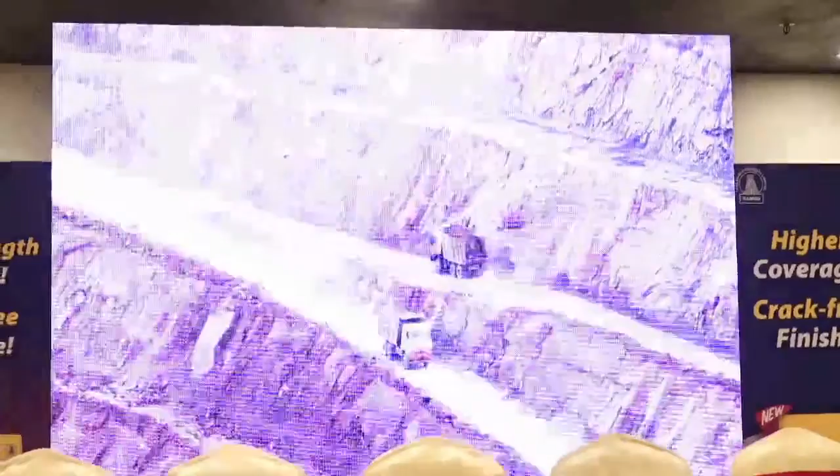In Pandalgudi, South India, at the limestone mines of Ramco Cements, we experience a commitment to change and a step taken towards restoring the environmental balance.

A phase-wise project that began in 2019 on 65 acres covered the next 150 acres in 2020. By 2023, we hope to cover over 800 acres of worked-out mines in the area.

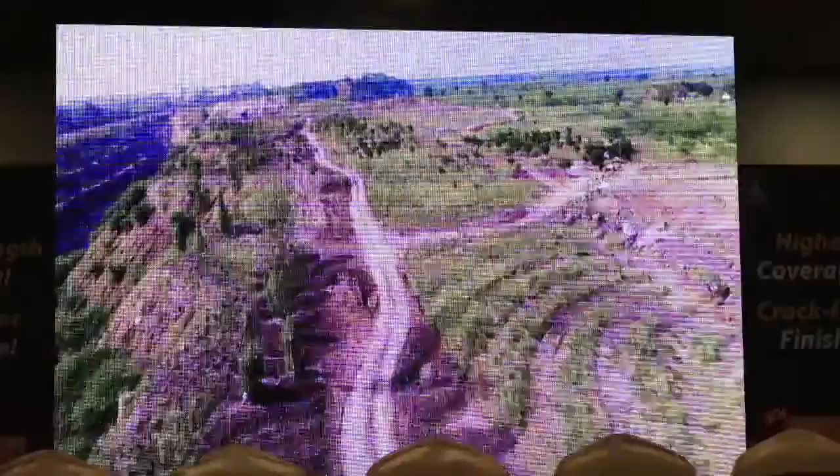So far, over 200,000 trees and shrubs have been planted on the land. This will rise to around 1 million once the project is completed.

And because biodiversity is the key for permanent change, over 80 species of native trees and shrubs have been used in the plantation.

Nature follows a process of succession, one life to the next. And now we know that a shift in our attitude towards the environment is essential if we wish to maintain a balanced habitat where we can continue to thrive as a species.

The process of change is constantly around us, whether we are aware of it or participate in it or not. The great realization comes when we see that our actions can influence the direction in which change will take us.

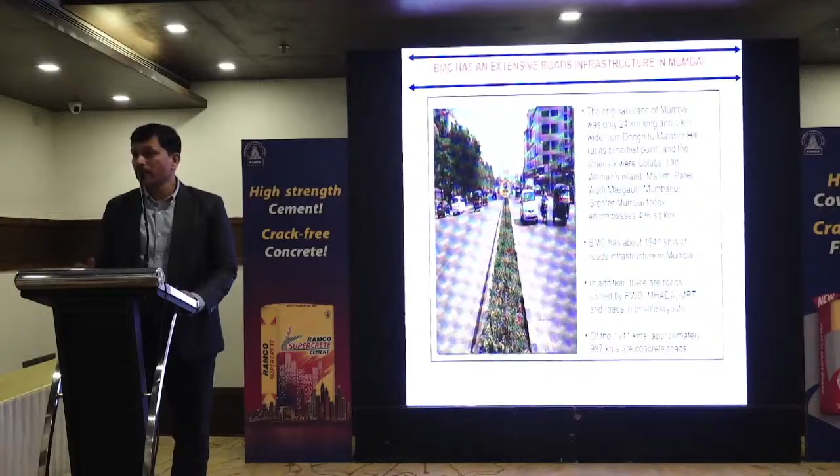I will not go into detail. As we all know, Mumbai is surrounded by the Arabian Sea, as Kerala is also surrounded by the Arabian Sea. So there are many factors similar to Mumbai. We have a rainfall of about 3,000 to 3,500 mm per year, while Kerala has about 2,700 mm per year.

Mumbai has a road network of approximately 2,000 kilometers of roads. Apart from these, some roads are owned by PWD, some by MHADA, some by MMRDA, MSRDC, and even private layouts. Till date, we have concretized up to 1,000 kilometers of concrete road in urban areas, which is the highest in our country if we are talking about city roads.

These are some of the activities normally carried out under the Chief Engineer of Roads and Traffic. Our Chief Engineer also looks after traffic departments, including maintenance, construction of development plan roads, maintenance of major roads and roads having bus routes, widening of existing roads, and various methodologies we use to improve roads such as asphaltification.

Then massification, interlocking, paver blocks, cement concrete, and finally thin and ultra-thin white topping. Apart from this, we have our own asphalt plant, ready mix and batch mix plant, where we produce our own bituminous concrete as well as cold mix for different emergency works. Another section is the traffic section, where we prescribe RLs and provide traffic amenities such as dividers, lane marking, traffic islands, and even pay and park.

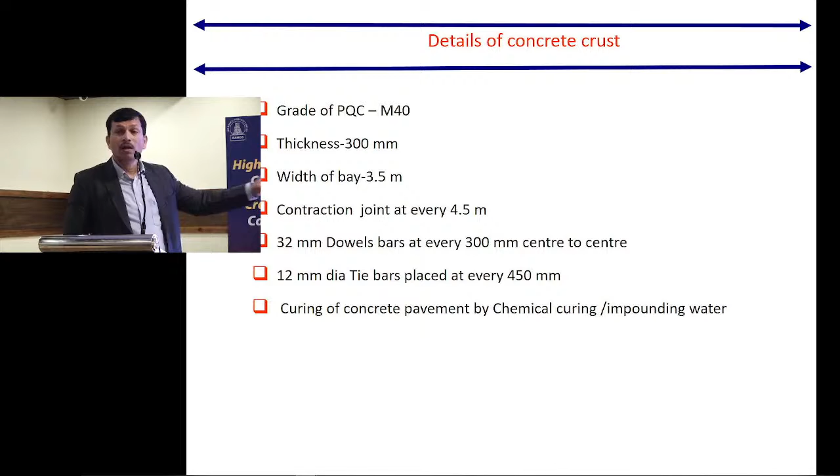Whatever these figures are, 32 mm or 12 mm, we actually design these. So after designing, these figures have come. Contraction joints, sometimes 3 meters, sometimes 3.5 meters - based on my experience, we arrived at these figures. But I repeat, we should design each and every road.

These are a few things we should keep in mind before, during, and after construction. Normally in Mumbai, we have a planning department - a team of engineers visits RMC plants. We have our own specifications, plus we approve RMC plants with RMC MA, so that whatever concrete comes on our site, the site engineer is assured it is from an approved batch mix plant, and we get good quality concrete.

Temperature plays a very important role in placing concrete. As per IRC, temperature should not exceed 30 degrees centigrade. If it exceeds, at your RMC plant you should use ice flakes so that your temperature reduces. As far as possible, concreting is done after 6 o'clock in the evening or early in the morning, so that we can maintain the laying temperature of concrete.

We strictly use RMC, so no site mixing is allowed. Then, covering the concrete surface with wet burlap immediately after finishing, and application of concrete curing compound. Curing plays a very important role in case of cement concrete pavement because the heat of hydration is tremendous in cement, and nowadays, whenever we use OPC, we get higher strength. So to maintain the moisture content in that concrete, we should immediately cure that concrete surface, either by chemical curing or pond curing.

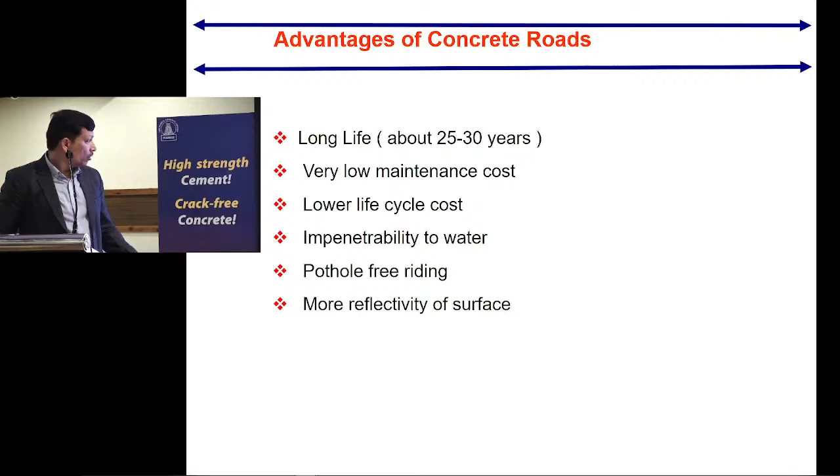Now I will go to the next topic, that is white topping. These are the practical problems which we normally come across with bitumen roads.

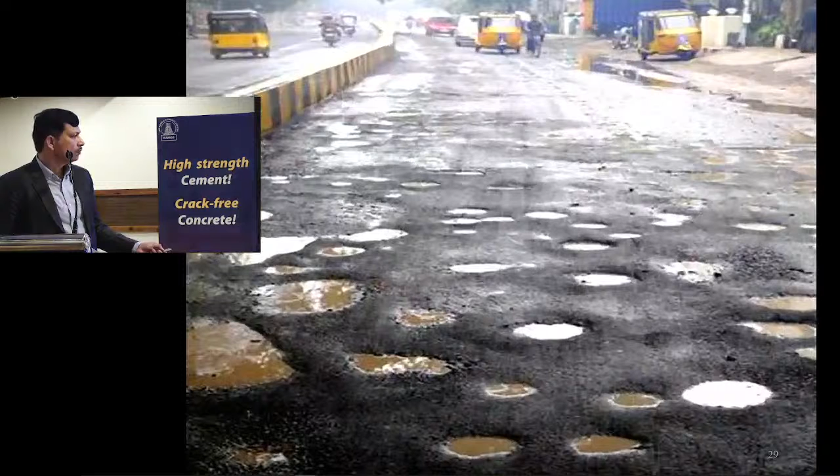These are the problems we normally come across - rutting, cracking, settlement and potholes. These are common problems seen all over India, which are expensive if the service life cost is considered.

Now, what are the reasons behind this distress? Why does this road get damaged? Improper subgrade - if your subgrade is not proper, water percolates and your consolidation is disturbed. Improper surface and subsurface drainage - this is a very important point, so surface drainage plays a very important role.

Whatever rainwater comes should move off the concrete or asphalt surface so that water is not stagnated on that particular pavement. Whenever water is stagnated on the pavement, and if rain is coming along with a high tide, your asphalt pavement gets deteriorated. The process is very slow, but it starts getting deteriorated. Leakage in underground water mains and wet utilities also contributes to this.

If you talk about Mumbai, some utilities were laid by Britishers, 150 years old, so they are getting damaged. Water comes out of these pipes and conduits, and there is a scouring action, so your pavement gets damaged. In most parts of our country, most of these utilities are below the ground, so we are not able to find out whether the joints are intact. After a few years, this problem arises - few years means 20, 25 years. So now there are instruments to find out the leakages of these wet utilities.

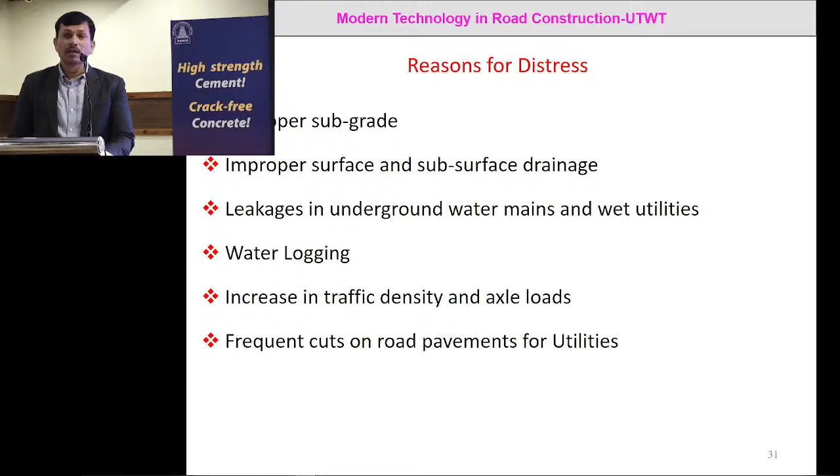So the STAC committee has also given guidelines on how to tackle this reinstatement of trenches, and we follow those STAC guidelines.

Current practice, whenever there is a pothole: we cut it into a geometric shape, clean the existing surface, put cold mix and roll it, and it's open for traffic. This is the normal procedure which we carry out.

But in Mumbai now we are addressing potholes with geopolymer concrete, with rapid hardening concrete, even with paver blocks, and even in some cases with M60 grade of concrete.

Now this is the current practice. Is there any alternative which will be durable, cost effective, and technically superior? We found it - it is nothing but white topping. White topping is a concrete overlay placed on an existing asphalt surface. By definition, it is a Portland cement concrete overlay constructed on top of an existing bituminous pavement.

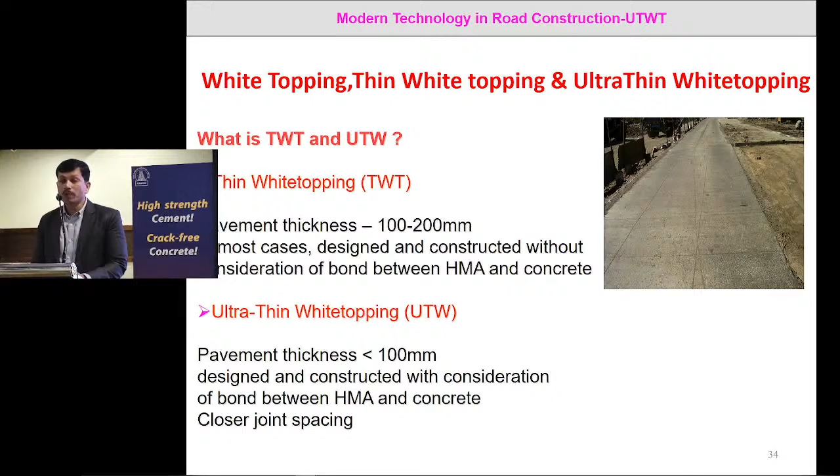There are three types of overlays: conventional overlay, thin white topping, and ultra thin white topping. This is differentiated as per their bonding and as per the thickness of pavement. Whenever the thickness is less than or equal to 100 mm (4 inches), we term it ultra thin white topping. Whenever the thickness is between 100 to 200 mm, we term it thin white topping, and the last one is conventional white topping. This is the typical cross section of thin or ultra thin white topping.

Normally, whenever we construct any pavement - whether asphalt, concrete, or interlocking paver block - we first excavate, then roll it, then put different layers: GSB layer, wet mix, DLC, and PQC, and it is allowed for curing.

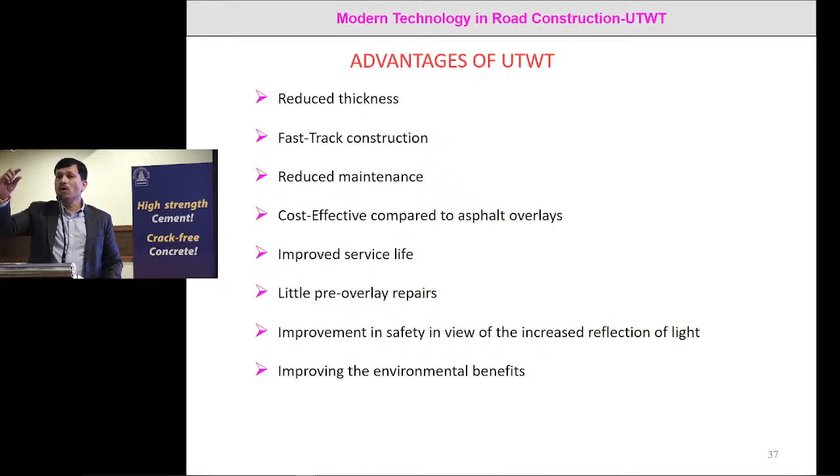Advantages: since we are not excavating anything, we only need a thickness of 100 mm, so we call it reduced thickness, fast track construction. We are not waiting for 3 to 4 months - within 7 days we are opening it for traffic. So we say it is a fast track construction technology.

It is cost effective as compared to asphalt, has improved service life, requires little pre-overlay, and improves environmental benefits. We are using mineral admixtures and chemical admixtures. In mineral admixtures, we are using byproducts - microsilica, fly ash, metakaolin, Alccofine. These are all byproducts we use in concrete without disturbing the quality of concrete.

As I said, we are milling the surface. Why are we milling the surface? To have good bonding between asphalt and concrete. Due to this bonding, it ensures a composite action between asphalt and concrete.

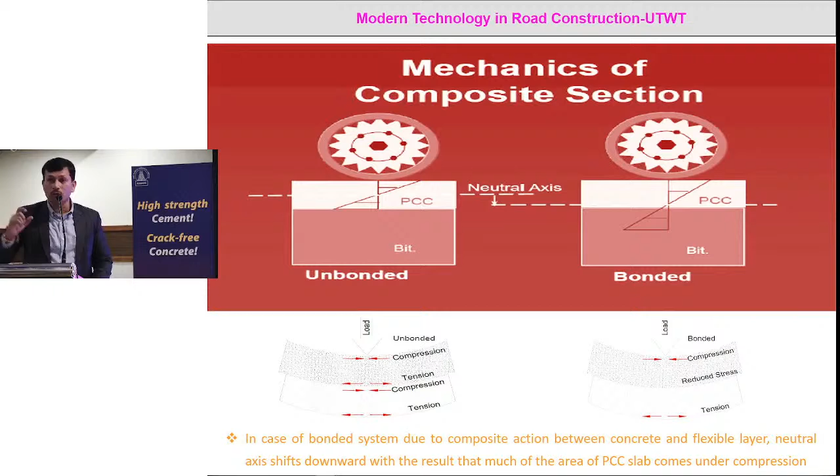If it is unbonded, then your neutral axis is in between. But if it is a bonded layer, your neutral axis comes down and we get more compression zone that we can use in white topping. Due to this, your stresses reduce.

For environmental benefits, we are replacing natural aggregates with waste tires. We have a number of waste tires which we normally dump to dumping grounds, and when we burn that waste tire, toxic gases come out, which are very dangerous to human health. So during my PhD, I had done this experiment.

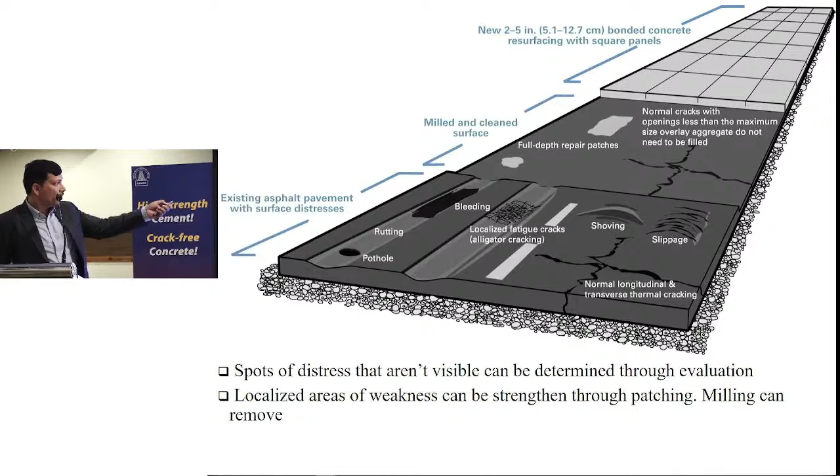Before construction, we have to just mill the surface, and on this milled surface, we have to put this white topping. This is the construction methodology.

Your temperature should be less than 30 degrees centigrade. RMC concrete should be strictly from an approved ready-mix concrete batch plant, and immediately your top surface should be covered with chemical curing.

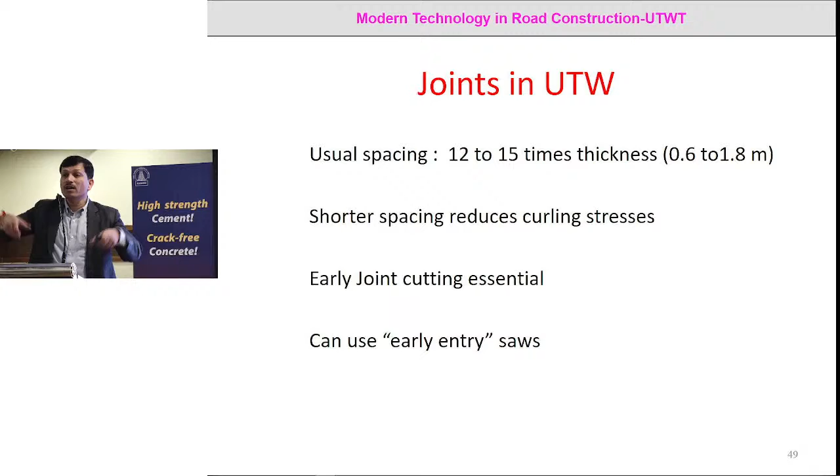Again, if you compare with concrete pavements, we are cutting at every 4.5 meters. But in this technology, we are cutting after every 1 meter. Due to this, whatever curling stresses are coming get reduced. So this is one of the advantages.

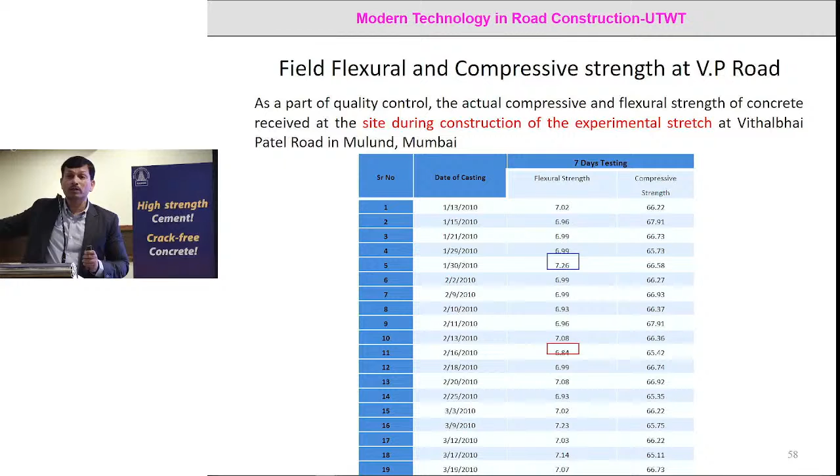IRC says that whenever we achieve 4.5 Newton per mm square flexural strength, we can open for traffic. Here we had achieved, after 7 days, 6.84 and 7.26. This means practically we can open for traffic after 72 hours. We don't have to wait 3 to 4 months. Even after 72 hours, we can open a new road for traffic.

But before that, we had done some instrumentation on Vithalbhai Patel Road, since this technology was new. As we all know, we assume something, do calculations, and if it is within permissible limits, we take that thickness. But we had proved practically what the figures should be while designing, meaning what the stresses and strengths would be coming on the concrete pavement.

So these are the strain gauges. We had thermocouples and strain gauges on the concrete. These are all practical photographs.

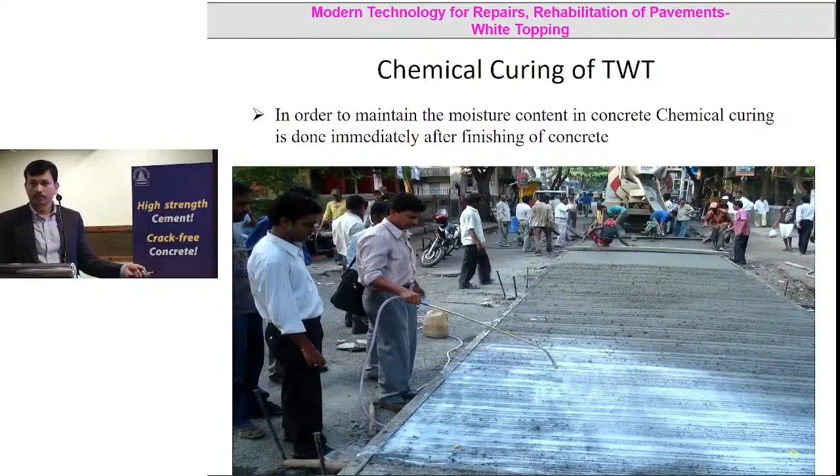Okay. I will finish these 2 slides, and then the coastal road after 10 minutes will take, with the permission of sir. So...

This road we had done within 3 days. Even after 14 years, there is not a single pothole on this pavement. We had done more than 100 roads in Mumbai. There is not a single pothole, not a single distress on this road by using this ultra thin white topping technology. We had started in 2006, and still these roads are there.

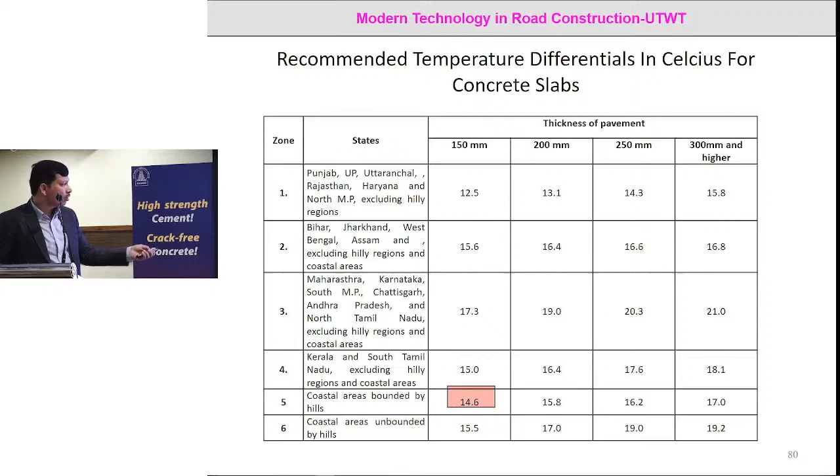All types of traffic are plying on this particular pavement. These are all the results. All types of tests have been carried out. Non-destructive testing has been carried out for durability. We are designing for sustainability.

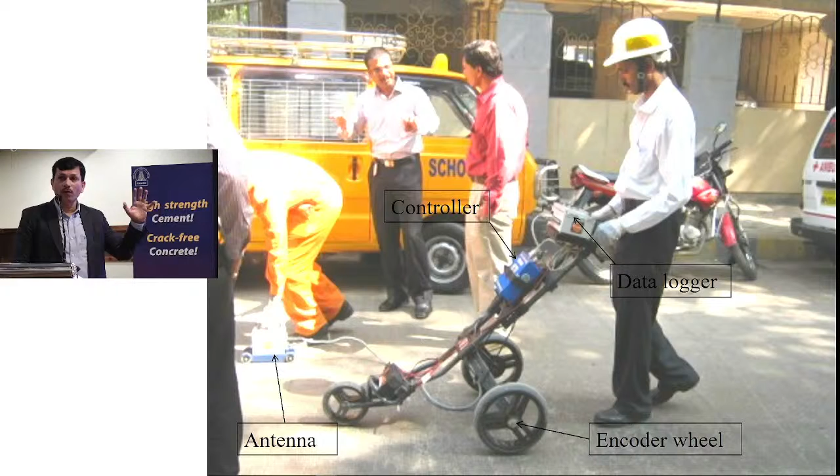Even we had done radar tests. In most cases, we don't know what utilities are underground. So this radar test was done because what we are doing is just milling the existing pavement and putting concrete pavement on top. We have to ensure a perfect bond between these two different materials. To ensure the perfect bond, we have done this radar test after every 2 years, and till date we have found that there is a perfect bond between concrete and asphalt. So these are the results.

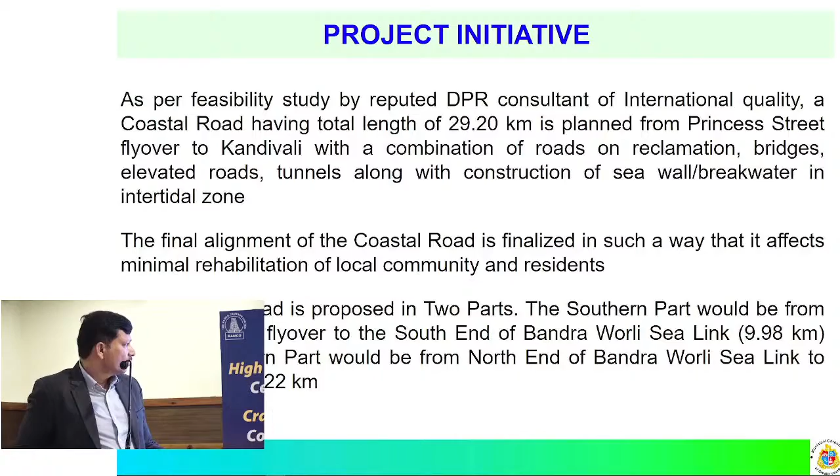So the alignment starts from Marine Drive, Nariman Point, and goes up to Kandivali. The total length of this project is 29 kilometers. This project is divided into two phases, phase 1 and phase 2.

Phase 1 starts from Marine Drive and joins the existing Bandra-Worli Sealink. Phase 2 starts from Bandra-Worli Sealink and goes up to Kandivali. So these are the two phases where the detailed project report was prepared.

We had invited tenders for phase 1. Currently, whatever the Mumbai Municipal Corporation is working on, we are working on phase 1, which is from Marine Drive to Bandra-Worli Sealink.

So we are calling it the south part and the north part. Now we are addressing the south part, which is the alignment starting from Marine Drive and joining the existing Bandra-Worli Sealink.

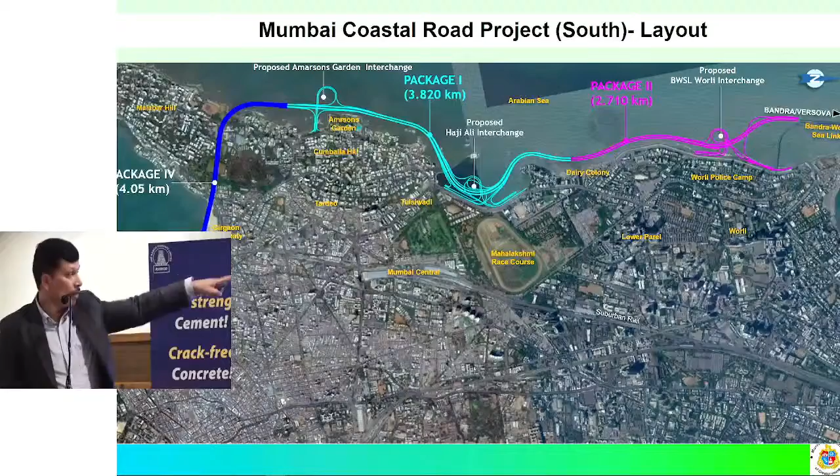This is the 3D view of that particular alignment. In between we are having interchanges at different locations, meaning from the coastal road if you want to come to the regular road, or from the regular road if you want to go to the coastal road, these interchanges allow you to reach your destination.

Now these are the different studies carried out during the planning stage. First, analysis of alternative alignment. We had studied about 8 different alignments in detail, and out of these 8, one alignment was selected.

Impact on roadside trees, because environmentally we should not harm trees since they provide oxygen and various other advantages. Impact on religious and heritage structures was also studied, since Mumbai has various heritage structures and religious structures in and around it, so a detailed study was done.

Sea level rise and natural drainage pattern was an engineering study for which we appointed National Institute of Oceanography located in Goa. Their scientists studied the last 100 years to find the maximum sea level during that period, and accordingly guided us in preparing our RFP, request for proposal.

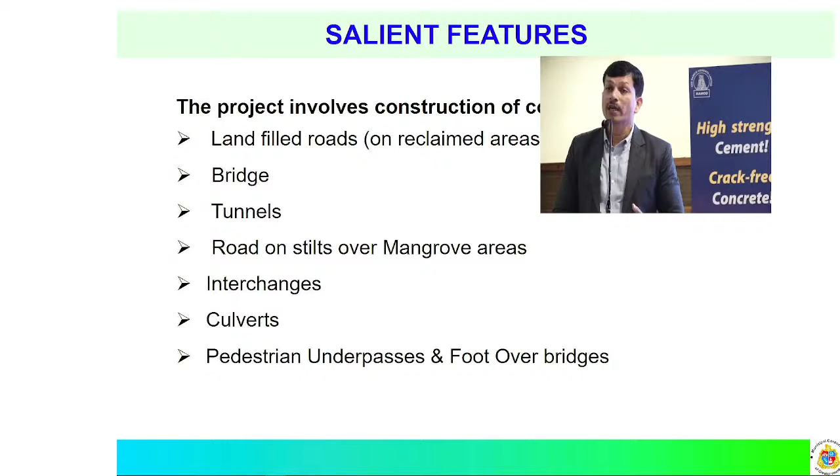Now the salient feature of this project is that it consists of everything: bridges, roads, tunnels, reclamation, gardens. So it's a dream project basically for any civil engineer. If he is working on this project, he will get all this experience under one roof. There are landfill roads, bridges, tunnels, road on stilts over mangrove areas, interchanges, culverts, pedestrian underpasses and foot-over bridges. So all parts are covered under one project.

That was for the entire project of 29.2 kilometers. Now we'll concentrate on the south portion, for which we had already invited tender and work is in progress. We are having a total length of 9.98 kilometers, now increased to 10.58 kilometers linear length. If we consider all interchanges, then it is more than 20, exactly 25.9 kilometers. We are having twin tunnels.

The tunnel starts from Marine Drive and comes near Nepean Sea Road, near Priyadarshini Park. The diameter of these two tunnels is 12.19 meters, which is the highest diameter in India as far as road tunnels are considered. The length of the tunnel is 3.45 kilometers each.

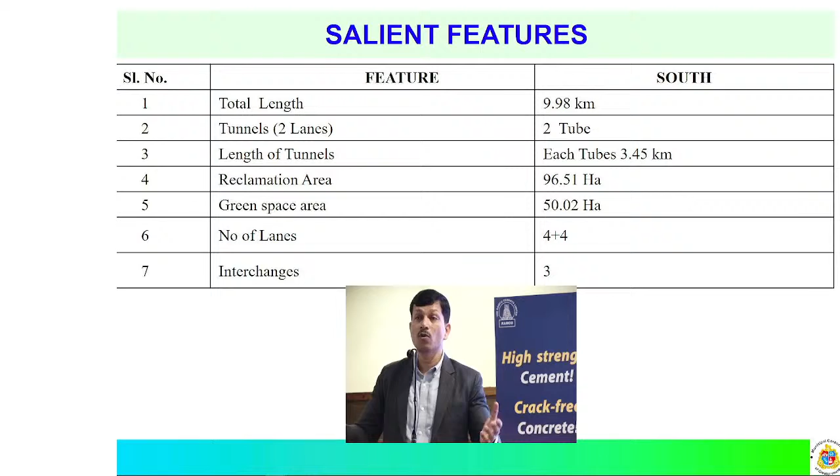Green space was originally 50.02 hectares, now increased to 70 hectares. Mumbai does not have open space for Mumbaikars to go and spend their time and relax. So we are creating open space for the citizens of Mumbai, about 70 hectares, such a huge open space. It will be totally green, with no commercial activity, no shops, no eatable items, only facilities for citizens, where they can sit, walk, jog, use a cycle track, and enjoy sitting there.

Number of lanes is 4 plus 4, and there are 3 interchanges. So these are the salient features of the Mumbai Coastal Road project, south portion.

Of course, traffic density plays a very important role, whether it is a road project or a coastal road project. So traffic study was done at every junction, and traffic was calculated for what would be the expected traffic in the year 2034. We studied traffic for a number of years, and accordingly the road and the project have been designed.

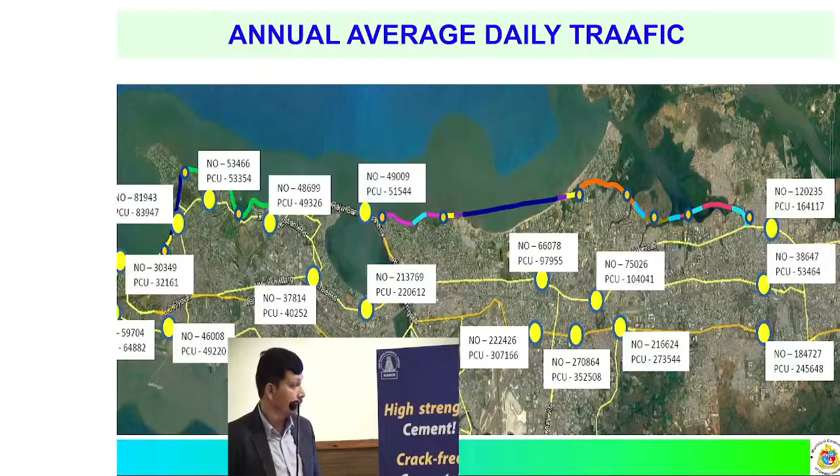Since it is into the sea, to protect the sea from waves, we are constructing a seawall. The length of the seawall is 7.47 kilometers with an average height of 8 meters. Such a huge seawall we are constructing on this particular project, along with massive reclamation up to 111 hectares into the sea.

On the sea side, we are putting armor rocks. Previously there were tetrapods made of concrete, but now we are using natural stones as armor rock. The weight of each stone varies from 1 ton to 5 tons. Such heavy rocks are placed so that the energy of sea waves is dissipated into these rocks.

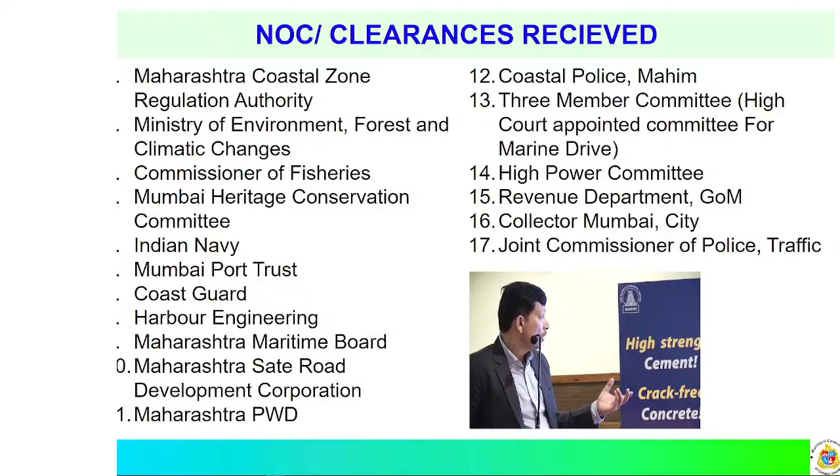So before inviting the tender, we had taken all these NOCs from the Maharashtra Coastal Zone Regulation Authority, MCZMA, MOEF, then the Commissioner of Fishery since we are constructing into the sea, then the Mumbai Heritage Conservation Committee, since there are a number of heritage structures in and around Mumbai. Then the Indian Navy at Colaba, Mumbai Port Trust, Coast Guard, Harbour Engineering, and Maharashtra Maritime Board. In total we had taken 17 NOCs before inviting the tender.

We had divided the project into packages. Previously, before inviting tenders, there were 4 packages, but looking at the size of the packages, we clubbed one package into another. So now there are 3 packages, as the third package has been clubbed into package 4. So these Mumbai Coastal Road project packages are package 1, package 2, and package 4.

These are the various contractors which we had appointed for this project. For package 4 and package 1, we had appointed Larsen and Toubro (L&T), and for package 2 we had appointed Hindustan Construction Company (HCC) in joint venture with HDC, Hyundai Development Company.

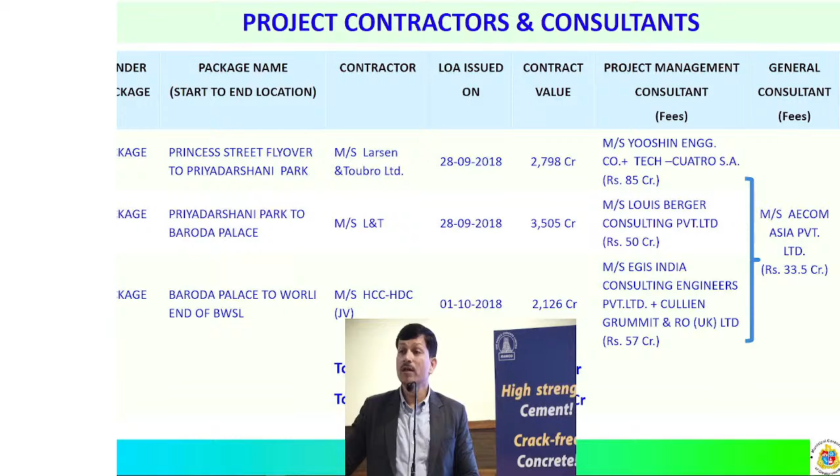Each package has one contractor, and for each package we have one project management consultant. For the 3 packages there are 3 project management consultants, and above these 3 project management consultants there is a general consultant. Above the general consultant we, the clients, are the Brihanmumbai Municipal Corporation. So this is the chain for this particular project.

The project management consultant is responsible for day-to-day quality control, quality assurance, and everything in day-to-day work. He has to look into it. If any specific sanction is to be taken, he has to go to the general consultant. The contractor goes to the PMC (project management consultant), the PMC goes to the general consultant, and then they submit the proposal to the client, BMC, for approval.

This is basically an EPC project. In this project, we had given only parameters; we have not mentioned any BOQ. This means the contractor is free to use any technology and any material, provided he does not diverge from the given parameters. So we had included some clauses.

If the contractor finishes the contract within the time limit or before it, he gets a bonus. If it exceeds the time limit, there is a penalty clause. So the contractor is free to bring any technology, which is then studied by the project management consultant, who submits reports to the GC, and finally it is approved by the client, BMC.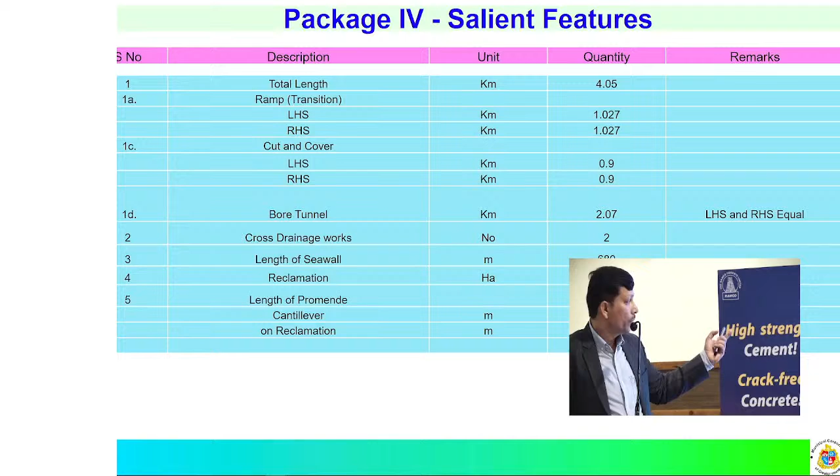Now package wise, we will just see. In package 4, the length of that particular package is 4.05 kilometers. It consists of cut and cover, it consists of bore tunnel, it consists of sea wall, it consists of reclamation, promenade, cantilever. So various points, various items are there, and you can see the quantity of each item in case of package 4.

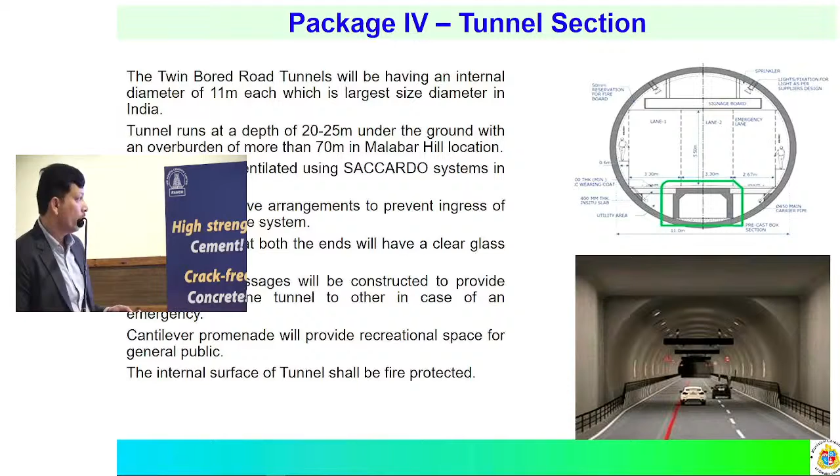Now, as I said, the diameter of tunnel is 12.19 meter. This is a twin road tunnel with internal diameter of 11 meters, external diameter 12.19 meters. For the first time in India, we are using Saccardo system of ventilation. Normally in tunnel there are ventilators at every equidistance, but in this we had provided Saccardo system. There will be one machine at one end, and from that end whole fresh air will be passed. So the number of fans will be reduced, and it is a proven technology outside the country, but in our country we are using it for the first time.

And there are two tunnels, and we had provided cross passages for connecting these two tunnels. If any accident occurs, then citizens can move from one tunnel to another tunnel immediately. In addition to that, we had provided SCADA system. We are going to provide cameras at equidistance. We'll be having one control room 24/7, so that if any unforeseen incident happens, immediately we can give help and we can evacuate the tunnel. So all precautions have been taken.

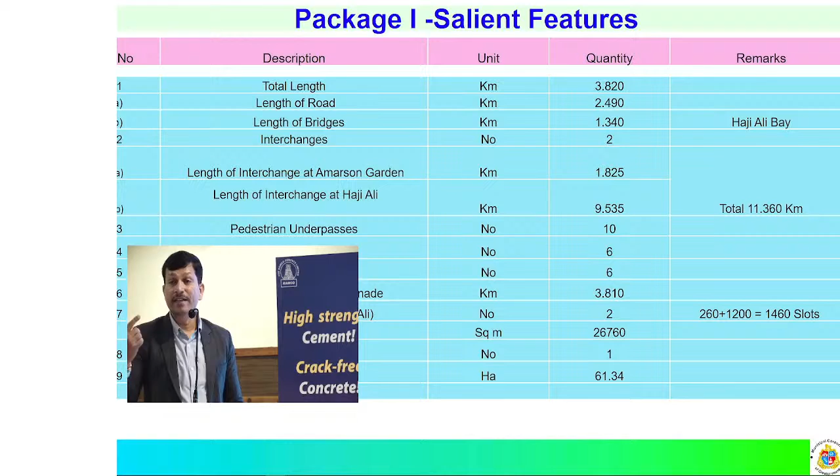This is package 1. The length of package 1 is 3.82 kilometers. This package starts when the tunnel ends. After that, there are reclamations. There are interchanges. This package consists of two interchanges, one at Amarson Garden and one at Haji Ali. Plus they are having two underground car parkings. Below there will be two levels of underground car parking. Above there will be a beautiful garden, and below that garden there will be two level car parking. So these are the details of package 1.

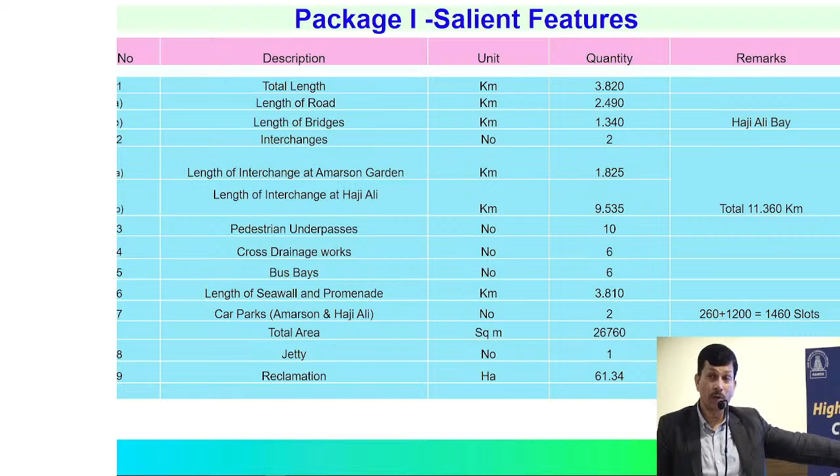They are having interchanges, then pedestrian underpass, cross drainage, bus bay. We are providing bus bay at equidistance. Whenever the bus comes, it will come inside and then go out. It will not block the existing pavement, existing carriageway. And these are the slots of car parking. In package 1, we are going to provide approximately 1460 slots.

Now I had just mentioned the span. What are the different spans for this project? Bridge spans in meters: 28 to 30, there are 7; 45 to 50, 50 to 55, 12, and 60 meter. At the request of fishermen for navigation of small boats which normally go for fishing, we had given a distance between 2 piers of 60 meters. Now, as per norms.

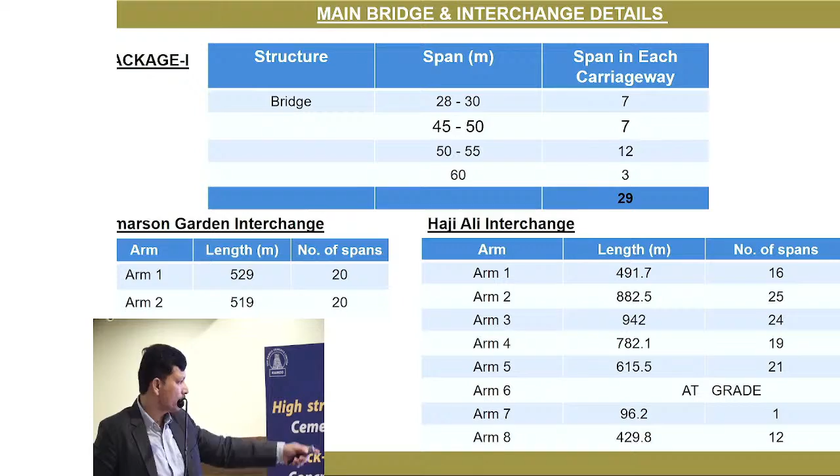Now this is the last package, package 2. The length of this package is 2.71 kilometers. This package is having one interchange, which is at Worli Sea Face. This package will be having a temporary jetty. These are the details of this particular package. It has bridges, outfall, connectors, pedestrian underpass, cross drain, bus bay, sea wall and promenade.

It is common for all car parking. Again, this package is having 2 car parks. The total car parks will be around 400. Again, it will be below the garden, 2 levels.

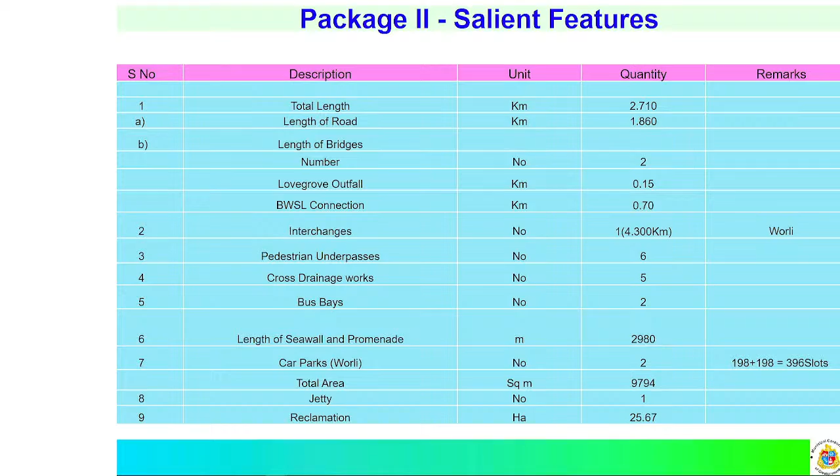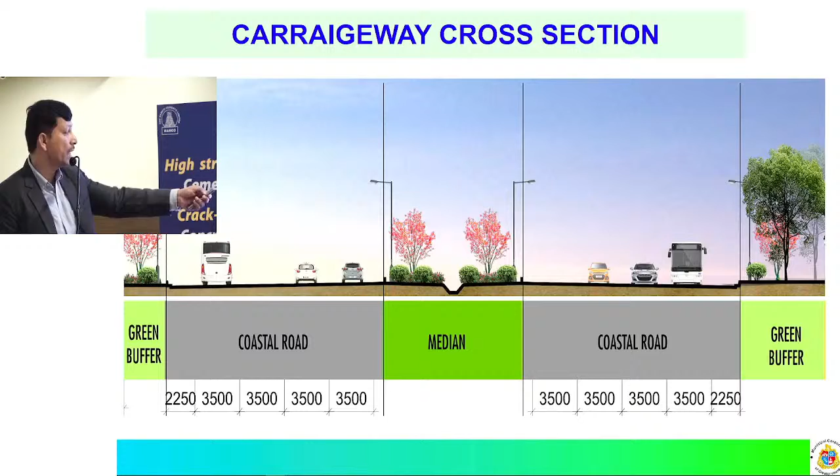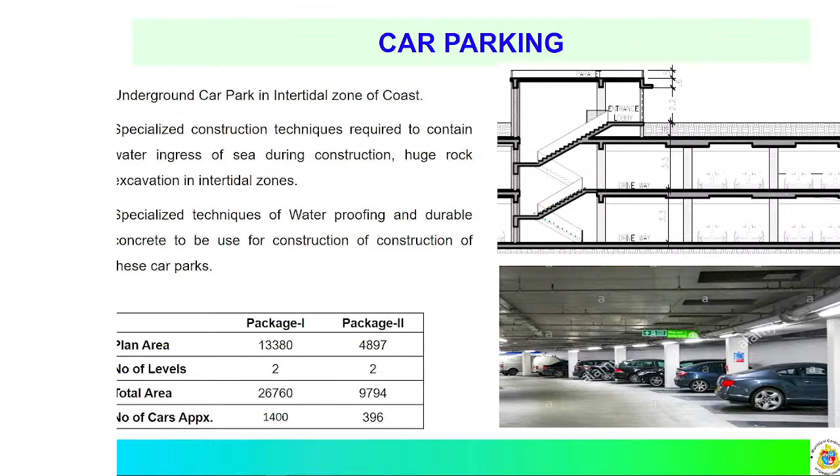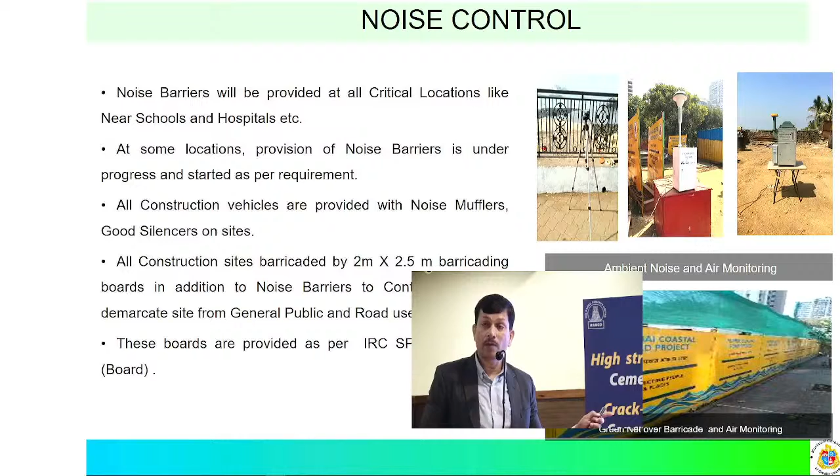For environment, 24/7 we had inserted instruments for detecting noise level, what decibels should be there. As per MOEF, we are maintaining the noise level within the permissible limit. For air quality, again some instruments are there. Contractor has deployed a special team to see all these environmental things. Noise barriers are there. These are all the instruments which we had kept, and these are monitored 24/7 by the contractor as well as by the project management consultant. Every month they are submitting a report to the client, BMC.

Now these are some of the photographs during construction. This is Princess Street flyover, and just 200 meters behind, our coastal road starts. These are all the practical photographs.

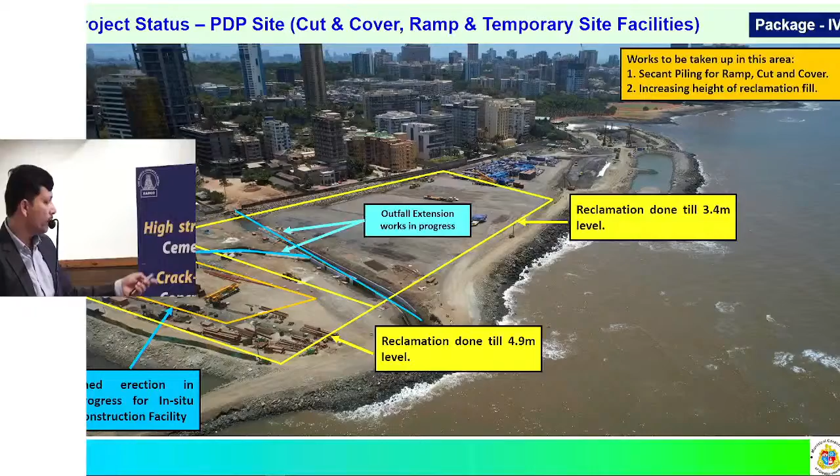This is the reclamation which is in process. We had allowed an RMC plant on this reclaimed portion, so that our progress is very fast.

Secondly, in this project, first time in India, we are going to use monopile. Normally, we are casting 3 to 4 piles. On these 3 to 4 piles, a group of piles, we have one pier cap, and on that pier cap we have the pier. So monopile, what does it indicate? Right from bottom up to top, there is only a single pile, a monopile. So your cost is reduced, your time is reduced, and your progress is very fast. First time in India, we had introduced monopile.

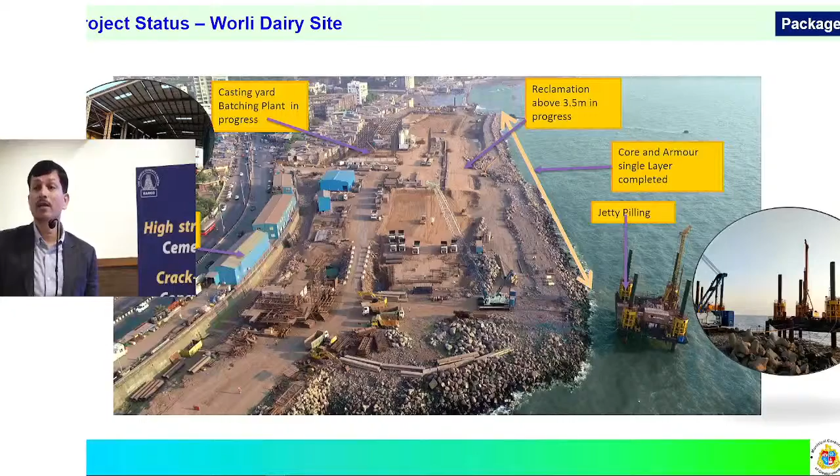So again, these are all the site photographs. We are also providing geotextiles at every location, so that whatever fines are there in the reclamation, it does not go into the sea.

Last two slides. These are the different project benefits. Better commuting facility for citizens. So whatever congestion is there on Pedder Road, Haji Ali, Worli Sea Face, all this traffic will be decongested. All this traffic will move to the Coastal Road.

Access to improved health and educational facilities. People can reach their destination very fast. Improved air quality due to reduction in traffic congestion. As we all know, whenever traffic moves slow, CO emits and the air gets polluted. So the main important thing is that on this particular stretch, there will be no signal and no toll. So there will be no traffic jam on this particular project.

Strengthening of the economy by ease of transportation of various materials of daily use. We are using all local materials available, we are not importing from outside, so cost is within limit. Transportation is done with barges, some through road, some through sea. So we had built some temporary jetties at various packages.

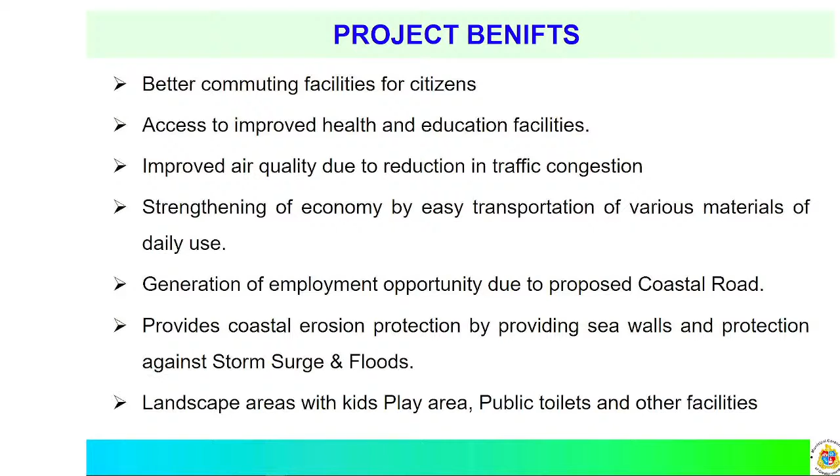Generation of employment. So many people, engineers and many workers, are working on this particular project. It provides protection from coastal erosion by providing sea walls and protects against storm surge and floods. Due to this sea wall, this has been taken care of, and this has been studied by NIO, the National Institute of Oceanography.

Landscape area with kids play, public toilets and other facilities. So these are the various project benefits which will be enjoyed by citizens.

Vehicular underpass. There is one vehicular underpass at Worli. Vehicle monitoring system is there. BRTS - there will be one dedicated lane for buses, so on that one dedicated lane only buses will ply. No other traffic will ply on that particular lane.

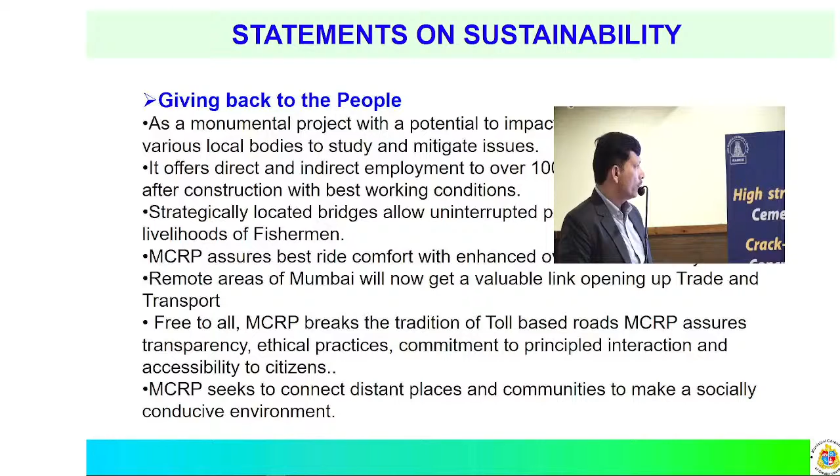As a monument, it engages various local bodies to study and mitigate issues. It offers more than 1 lakh individual employments.

Strategically located bridges allow uninterrupted passage of boats to protect the livelihood of fishermen. We have taken care of fishermen so that their livelihood is not disturbed.

Mumbai Coastal Road project assures the best ride comfort with enhancement of all road safety. Cameras are there, so there is no lane crossing. Various systems are provided at various points.

The remote area of Mumbai will now get a valuable link boosting trade and transport. It is free to all, meaning there will be no toll on this particular project.

Thank you. I will just show you one walkthrough video, and your points will be clear. All renowned contractors, consultants, and the general consultant are working day and night on this project. Every care is taken before inviting tender and during execution of work, and we are sure that before November 23, we will be able to complete this project and open it for the public.

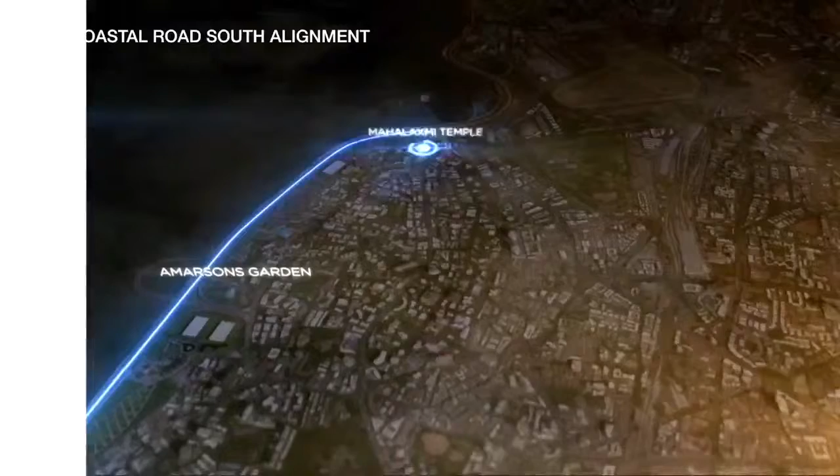This is the south section which we had taken from Marine Drive, Girgaon Chowpatty, Priyadarshini Park, Amarsons Garden, Mahalakshmi Temple, and finally connecting to Worli.

It starts from Princess Street Flyover and it goes into the tunnels.

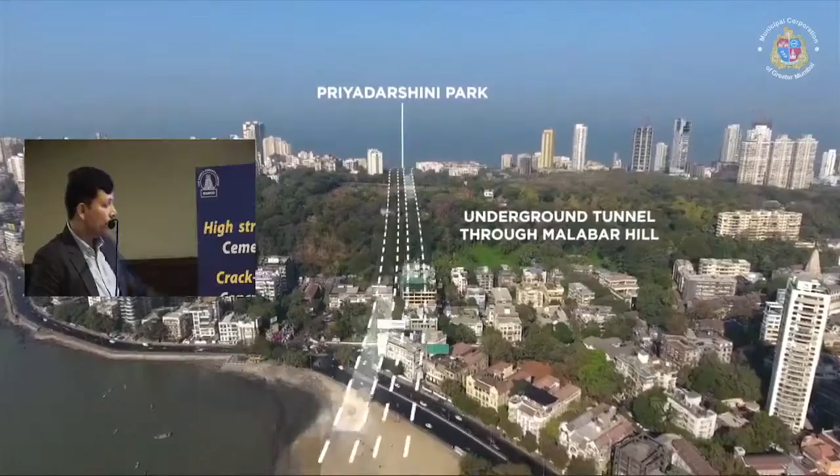This is transparent so that your sea view is not affected. This is the underground tunnel which is below Malabar Hill Reservoir. This is the first tunnel which is below the sea.

This is the traffic arrangement from Tardeo to Bhulabhai Desai Road, Breach Candy Hospital Road, link to Amarsons, Amarsons to Marine Drive, and link to Amarsons.

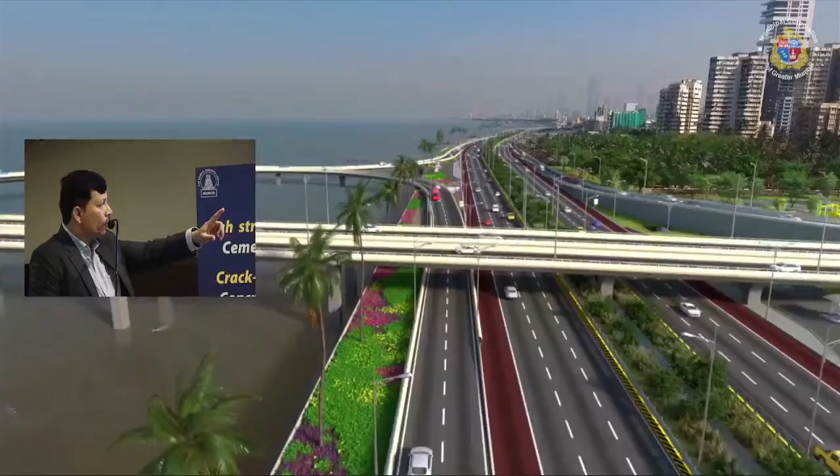This red portion is dedicated for buses. So if you want to come from Bhulabhai Desai Road, you can take this interchange and come to the Coastal Road, or vice versa.

We had already started constructing these monopiles into the sea. This is how it will look. These are the two car parks.

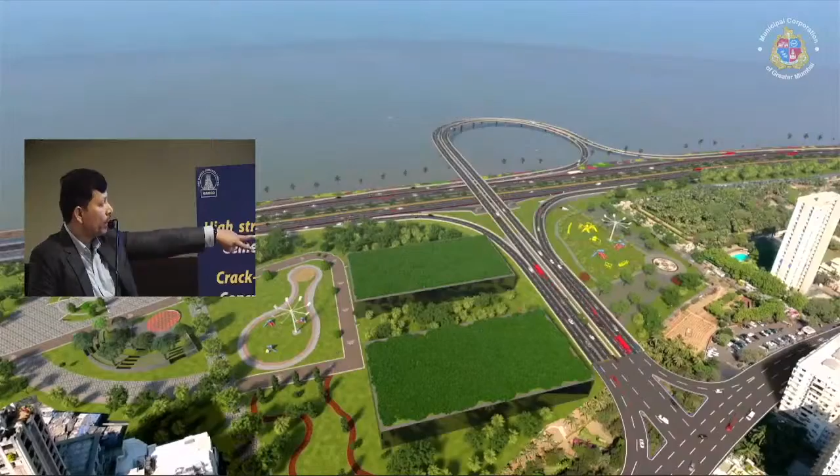Now we are coming towards Haji Ali. There are 3 layers of bridges and interchanges, that is near the race course, Mahalakshmi race course.

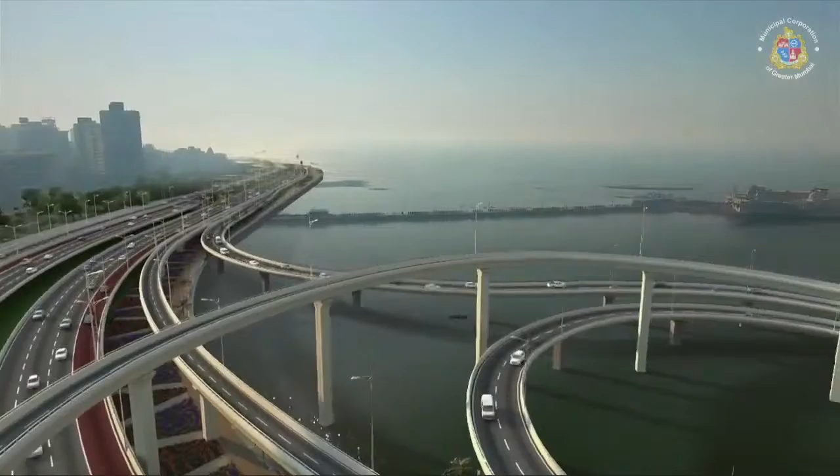Actually, we will see this. Already this construction of monopile is in progress. This is how it will look after 2024.

Traffic arrangements: Worli to Marine Drive, Worli to Sea-Link, Marine Drive to Tardeo.

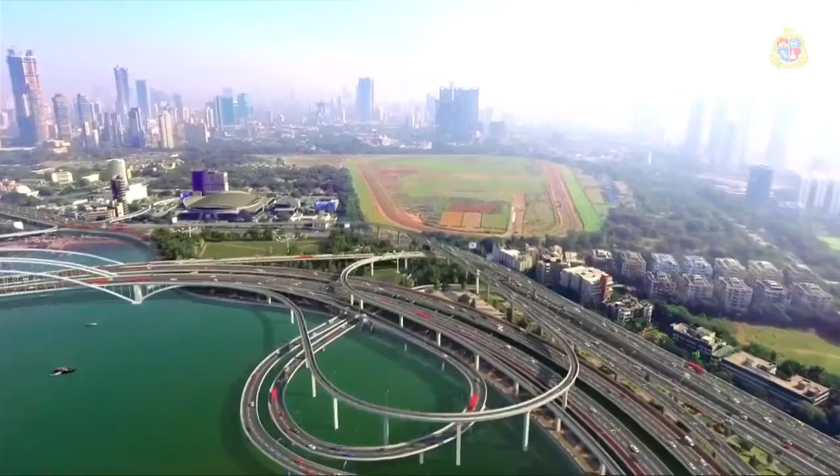This is a pedestrian underpass so that people can go to Haji Ali Dargah. This is the top view. This is the most complex interchange.

This is the navigational bridge. This is the multi-storied car parking. There is a bus terminus. Again, traffic arrangement.

This is at Worli Sea Face. This is the Worli interchange.

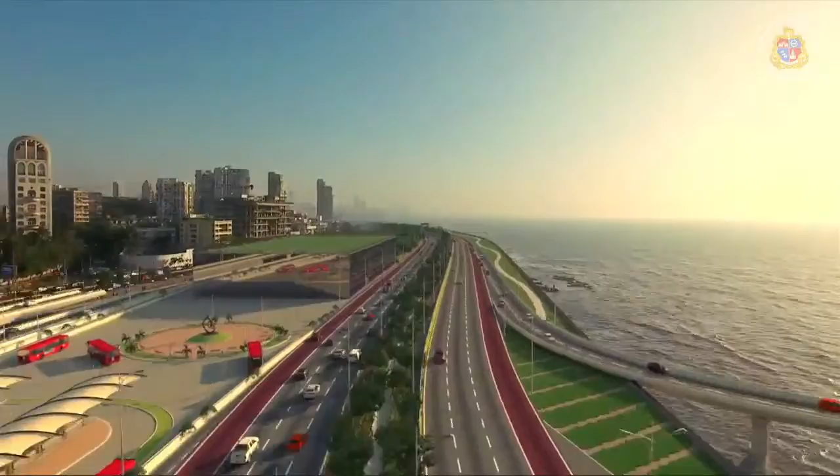This is additional open space which we are going to construct, with a cycle track. There will even be some selfie points.

I invite you all to visit this project. It's worth seeing. Under this project, all parts are covered: bridges, reclamation, tunnels, and all structures and elements. So if ICI takes us to Mumbai, I invite you all.

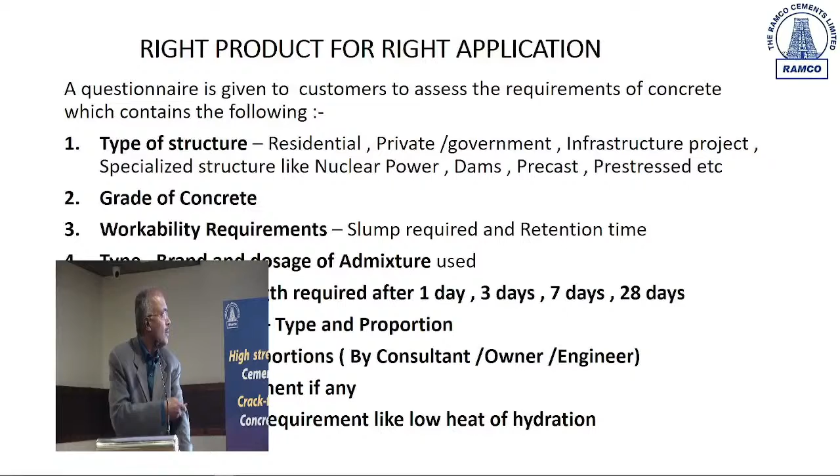The speaker was also talking about the service life. So when we talk about customization, we are talking about the kind of concrete that we are going to put in the structure, whether a concrete structure or a road, with various parameters. The parameters needed for concrete must be looked into: compressive strength, workability, durability. In fact, durability is not given much importance and is not evaluated, but durability has a direct link to the life of the concrete structure.

We all know there are a number of models linking practices and types of materials to the design life of a concrete structure. But before that, we need to understand the different types of requirements: the admixtures, the superplasticizers, and the kind of blending materials that are going to be used.

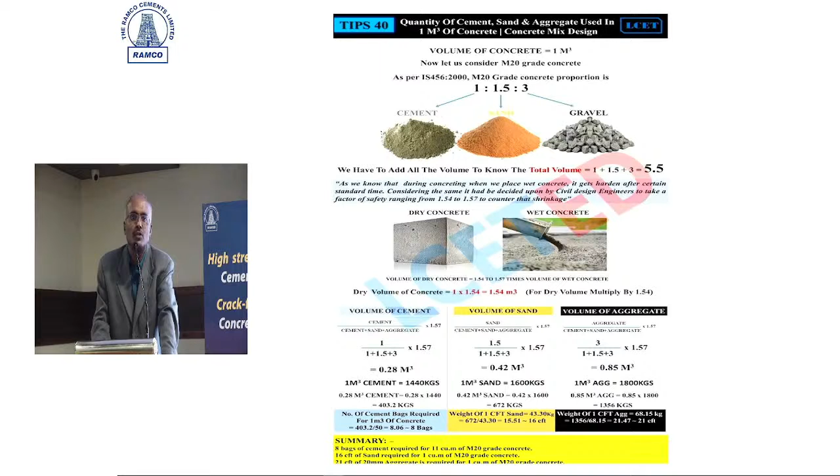This slide may not be clearly visible to all of you, but the message we're trying to give is that many unorganized sites follow the practice of volume batching. If we can convert that to weight batching, I think a lot of errors can be taken care of. We have seen in many construction sites, when we talk about ratios like 1:1.5:3 or 1:2:4, how effectively these are converted from weight to volume, because many places cannot have weigh batching. But the weight can be effectively converted into volume so that the quality of concrete is maintained.

When we talk about the various parameters, a lot happens in concrete. It's not only the materials going into the concrete, but also the practices involved. That is why, along with materials and the type of cement used for a particular structure, the practices also need to be customized based on weather conditions, like hot weather concreting versus concreting during normal weather.

So at Ramco Cements, we have been able to look at cement from various perspectives, based on the kind of requirement. As you all know, for high performance concrete for residential buildings, we have Ramco Supercrete, which has a high rate of gain of strength as well as low heat of hydration, which reduces the incidence of cracks. But that doesn't mean you should not follow the required practices.

For example, timely curing, and ensuring the concrete is protected from harsh weather conditions, especially during the hot summer season. Then, for the individual house builder, we have a product meant for plastering and non-structural applications like brickwork. The type of material required for that is different from what's required for concreting, hence the customization.

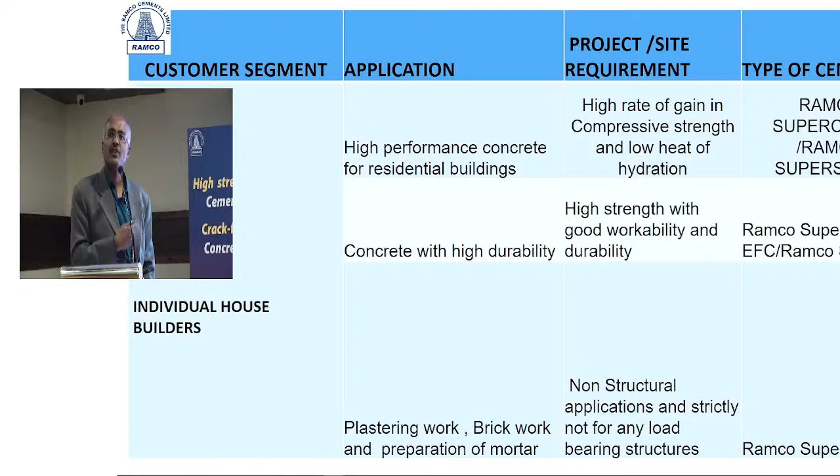Now, if you look at infrastructure projects, different projects have different requirements, such as slump retention time. The time of transportation of concrete from one place to another can vary between 1 to 3 hours, or sometimes slightly beyond, in which case we have to design the concrete accordingly. Based on that requirement, we have various types of cement ranging from OPC 53 to infra grade, based on slump retention time. So even for infrastructure projects, we have various types of cement.

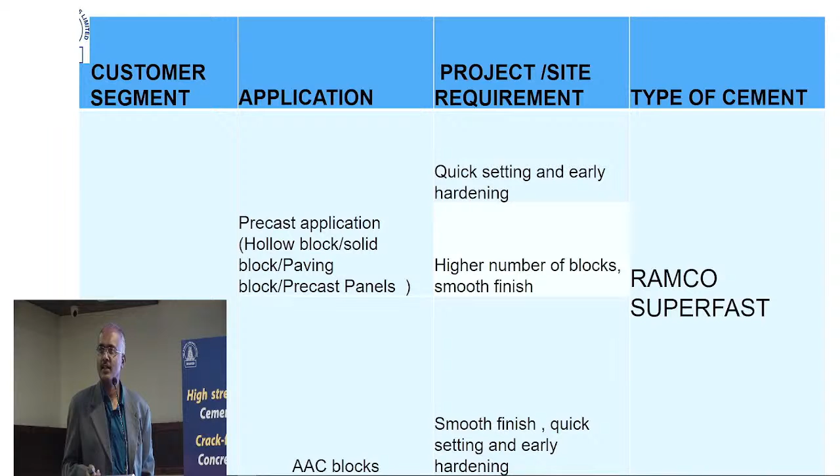For the precast segment, for hollow blocks and solid blocks, we have Ramco Superfast, which has high one-day strength. As we all know, in the state of Kerala, there are a number of block manufacturers with different requirements, and ready-mix concrete units also have their own requirements with different admixtures. So at our Ramco Research Development Center, we use various mix proportions to study how different chemical admixtures behave with our various types of cement, and then make recommendations accordingly.

Even the structures near seashore marine projects, as the speaker was just telling, the kind of challenges that are there, even the concrete needs to have the resistance to various kinds of attacks. As all of us know, in IS 456, the code of concrete, we have the sulfate attack, the chloride attack, which needs to be resisted.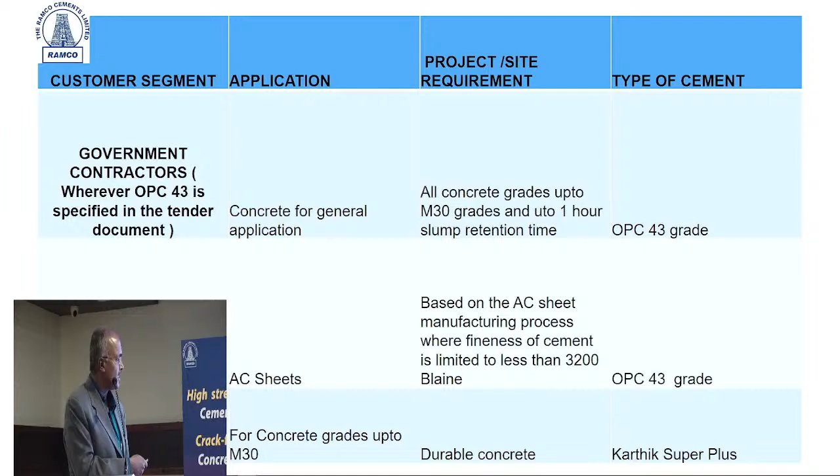And based on that, we have various types of cement for various other segments, which I am not going into detail. But then we need to look at the various segments and then see what kind of cement and what kind of practices is suitable for those.

Now the thing is that earlier we always had the practice of specifying a type of cement. Now the practice is to specify the type of concrete, and based on that what type of cement is required. That should be a more logical way, and that is how we have been able to do that.

Even our dry mix division have various products for various applications, whether it be for fixing tiles, fixing blocks, or for general purpose plaster. We have various kinds of this. So these are some of the things, and this is very important.

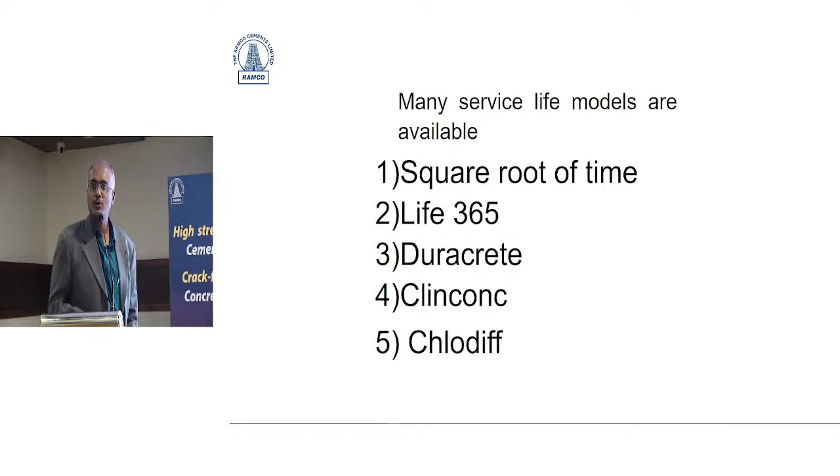We need to look at the design life of structure. For different types of structure, the design life can vary. And for that, as all of us know, there are models in the international codes which look at the durability criteria, the type of practice to the life of structure, which can be looked into. But Indian standard codes have not brought this element into practice. Maybe in the years to come, we may be able to look at how the design life can also be incorporated by virtue of various models.

Now, if you look at the various models available online, you would find that a particular practice can also have an effect on the life. Say, for example, if you look at the cover to the reinforcement bars, if the quality of the cover and the quantity of cover is good, there is a particular weightage that is given to the life of structure. Especially as all of us could understand logically.

So the practices, the type of materials, whether you are using blending material, blended cement, to reduce the heat of hydration, also has an effect on the service life of the concrete structure. So those things can always be there.

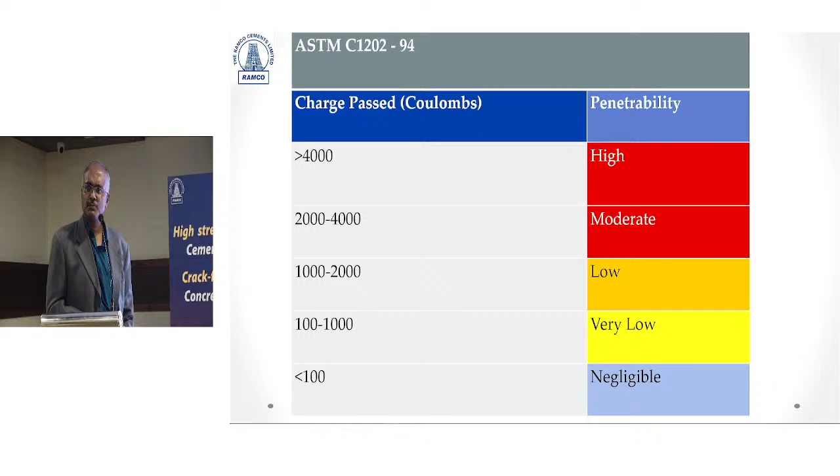Now these are some of the equipments that can be used for evaluating the durability of concrete structure. The RCPT test evaluates how much of ions pass through a particular specimen, and in a way gives you an idea, based on the charge that is passing through the concrete specimen, how much durability is there. More charge that is being passed means the concrete is not that durable. Lesser charges, that is why you will find the lesser the coulomb, the more durable the concrete structure is.

Instead of charge, if there is water that can be passed at high pressure, especially projects like Kudankulam nuclear power project with which we are associated, they evaluate the durability like this. Rather than using an RCPT test, they go for water permeability test. And logically speaking, the water permeability has to be lesser than the concrete cover. But for a nuclear power project, the requirement may be more stringent. It may be much lesser because the first deterioration happens to the reinforcement bar. So we need to ensure that the water that is penetrated through the concrete, by virtue of water permeability test, should be very negligible, especially for critical structures.

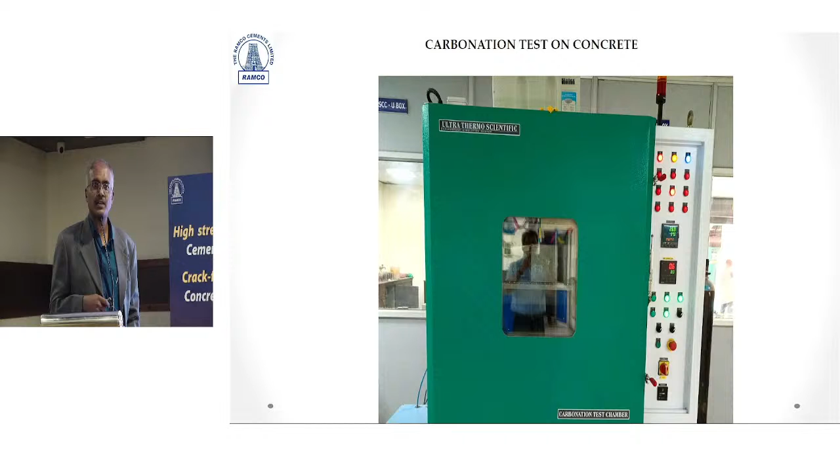You have the carbonation test, which we have the facility for at our Ramco Research Development Center, to look at concrete when it is subjected to carbon dioxide, how it can resist the carbonation. The carbon dioxide has an effect on the free lime, and then you have the calcium carbonate that is being formed. Of late, there has been discussion in the BIS also of how composite cement, when used in concrete, how the carbonation takes place. A lot of studies is being also done by National Council of Cement and Building Materials. We also have the facilities at our research center to look at the carbonation test.

These are some of the tests to look at the probability of cracking. This is a simple test, the shrinkage crack test, wherein you have a concrete specimen in the form of a circle because there is some stress that is being developed.

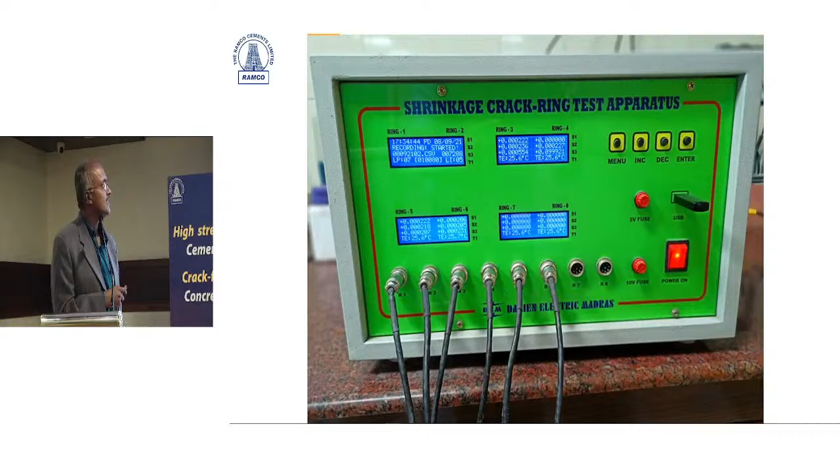The stress, due to the strain, you develop the amount of displacement that is happening, and then you probably predict whether the crack occurs in concrete using different mixes and different materials. This is one test which we are using at our research center to forecast the probability of crack occurring in a concrete specimen.

The shrinkage crack ring test apparatus, that is what the apparatus is all about. The plastic shrinkage cracks, all of us face this challenge during hot summer weather. We know the remedies, we see them over and over again, but many times we are not able to implement those practices at site, especially when there is a high rate of evaporation of the concrete surface. Avoiding shrinkage cracks involves covering the concrete surface, curing it, and ensuring that the evaporation loss is negligible.

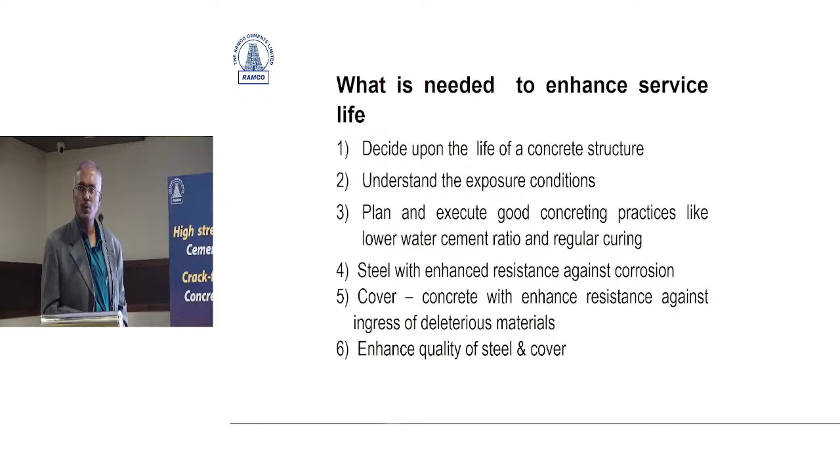There are a number of studies enhancing service life. That is what every client wants, every engineer's dream, that the structure which I have designed for a particular period should cross that period - it can be 100 years, 75 years, or 50 years. But are we incorporating that design life into our design and implementation? That is something we need to look at, starting from the design phase to implementation, and most important, are we paying attention to the maintenance of the concrete structure, especially in a place like Kerala where you have heavy rains.

Concrete maintenance is taken for granted. We have places where water is stagnant on the slab, on the roof. You have an outlet pipe on the roof, but is the water really flowing through that outlet pipe? And is the number of outlets given on the roof sufficient so that the water flows and there is no stagnation? As all of us know, stagnation of water on a concrete surface for a longer period of time can lead to deterioration of the concrete surface - it can cause dampness, leakage, and a number of other effects.

All of us know why blended cement is used - because of lower heat of hydration and resistance to chloride and sulfate attack.

Quality is a teamwork. When you look at the team, a very simple technique of calling all the workers before concreting and briefing them for 10 minutes can do wonders. That's what our technical services team, the MACE team, has learnt during interaction with construction professionals. A simple communication - why do you do compaction in concrete, how does that go a long way in ensuring the concrete is impermeable - can be an eye-opener.

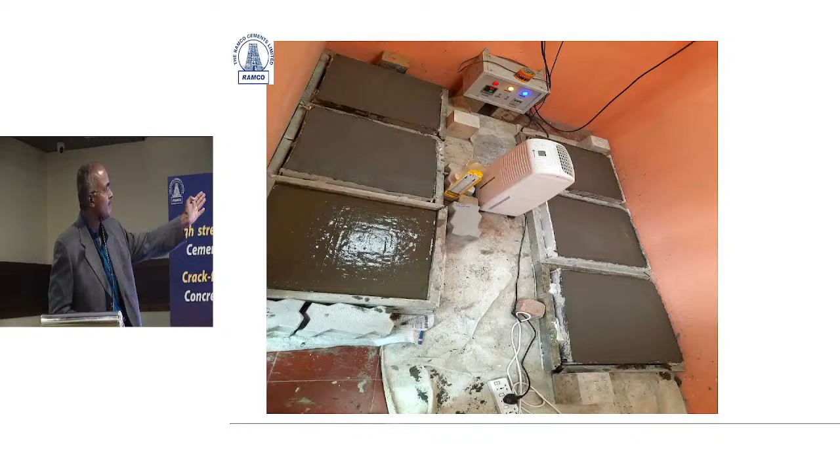These are some of the tests that we also do. We increase the temperature, we increase the wind velocity, we make slab specimens and see how crack formation happens, and what we can do as far as the quality of the material is concerned.

A lot of studies on RCPT versus water cement ratio have been done - I do not want to get into the details of that. Of course, the river sand versus M sand debate goes on, but suffice it to say that M sand, as long as it satisfies the grading requirement with minimum dust content, is always a good option, because many of the trials we have been doing at our research center are with M sand as well.

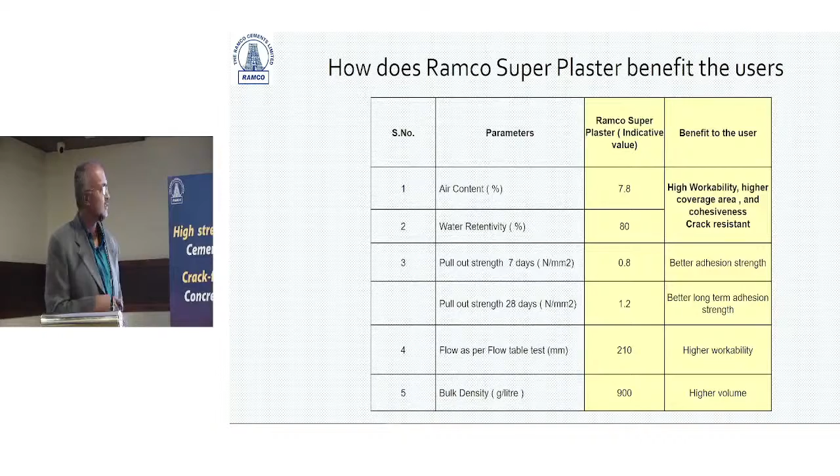So that's it, I don't want to take much of your time. All of you who have been using Ramco Supercrete know how effective it has been. For Ramco Super Plaster, we don't look at compressive strength as we do for concrete products. Instead, we look at air content and water retentivity, because it has to spread over a larger area and coverage is very important - along with pull-out strength, flow, and bulk density, which is even more important.

A lot of construction companies and institutions have been associated with us. Sustainability is also very important. Our Ramco Research Development Center has worked on a number of projects, which I won't go into detail about. We also recently launched an online resource on various topics in civil engineering, as many of you would be aware.

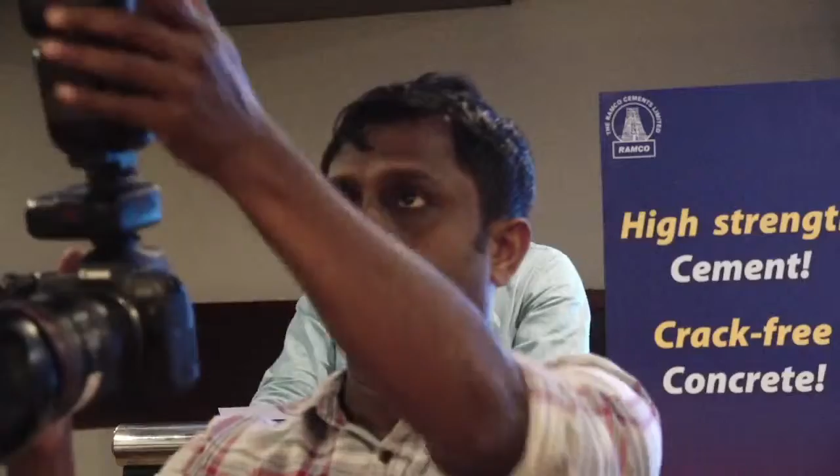Good evening all. It's already late, so I'm going directly into the responsibility given to me. I'm sure you are all waiting after hearing the mind-blowing session of Dr. Vishal Tombare. On behalf of ICA Calicut, I thank our speaker of the day, Dr. Vishal R. Tombare, for giving a wonderful talk on the project going on in Mumbai. We hope ICA Calicut will visit the project site and get more on-site feedback from you, sir.

On behalf of ICA, I thank our minister who came here as the chief guest, and due to his hectic schedule he has gone early—anyway, we thank him on behalf of ICA. And I thank Engineer Anil Kumar Pillai for giving a talk on various aspects of cement and concrete. Thank you, sir.